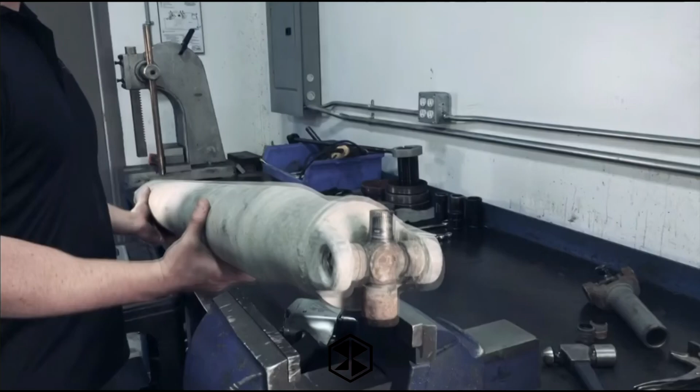This press can be used for a number of different removal and installation jobs on various driveline and non-driveline related parts, such as universal and double cardan joints, wheel studs, and suspension bushings, just to name a few. Any socket with 1/4 inch, 3/8 inch, or 1/2 inch drive can be used in any combination for use on virtually all cars, ATV, UTV, side-by-sides, light-duty trucks, and farm equipment.

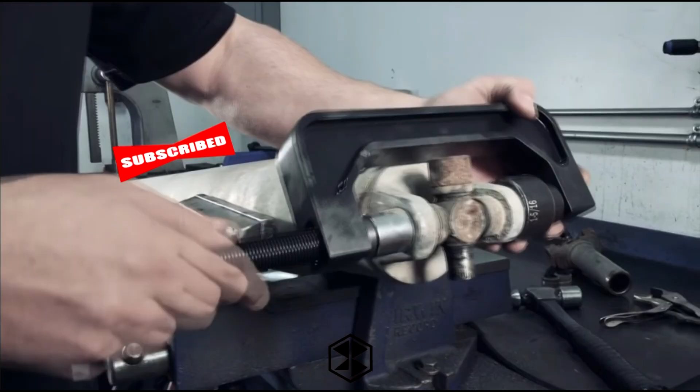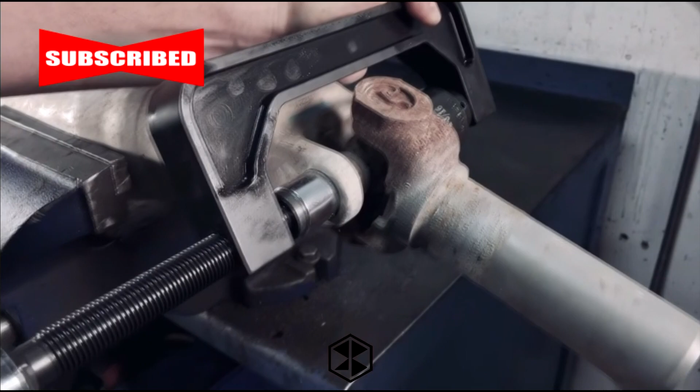Manufactured from high-grade steel for strength and durability, the C-frame can tackle nearly any job with up to 2.5-ton capacity. Each of the components are machined from hardened, self-lubricated steel to help prevent galling and to ensure long life.

Consistent with the rest of the Tiger Tool line, the automotive C-frame socket press is made in North America with quality, reliability, and safety in mind.

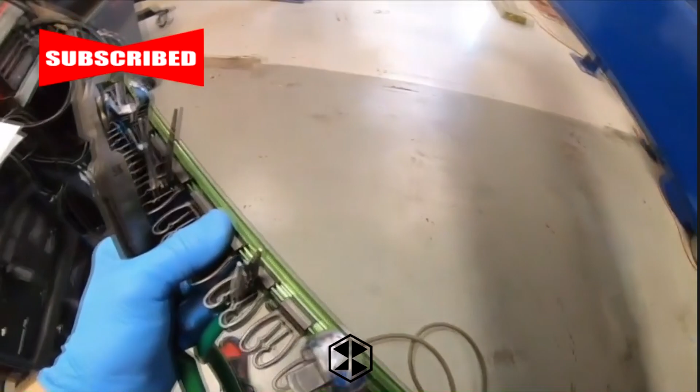I'm Jared Dienda. We're here in Kenosha, Wisconsin at Snap-on Tools World Headquarters. I'm here with John Landry, and we're talking about cordless ratchets. Hand tools are great, but sometimes you need a little bit of power. What do we have? Well, what we have here is a selection of cordless ratchets.

With the introduction of cordless ratchets a couple years ago, it allowed the technician to actually be able to do the work by hitting a button in addition to having the manual torque. We start with the 1/4-inch model, which is a dedicated model that has a smaller profile head, and it has 35 foot-pounds of torque and 350 RPM. This is ideal for under-dash work. A little more compact, and then we start moving up.

And then we talk about the 3/8 model. Again, bigger in size, has a dual pawl mechanism, bigger head, 40 foot-pounds of torque, 280 RPM, and with that, you're able to do intake manifolds. With the long neck version of the 1/4, you actually gain 2.5 inches of access, and with that, you can do belt repair, or you might be able to do some additional bodywork repair.

Furthermore, with the 3/8 model, you're able to do 158 foot-pounds of manual torque, in addition to having the ability to hit the button and get 40 foot-pounds of torque, or 280 RPM. And with that, you might do bell housings, you might do water pumps. All right, so we got 1/4 and 3/8, and then over here we got...

We have the 1/4-inch hex driver, and what's neat about this is you can take a bit, put it into this head, and when you compare it to the profile of a ratchet with a bit socket, you'll notice that you gain almost an additional inch of clearance. Where this is great is where you would do TPMS repair, where you're able to take the wheel, deflate it, access the sensor without removing the tire from the rim.

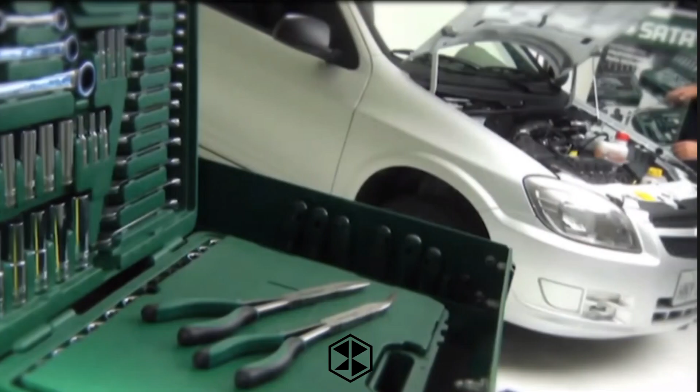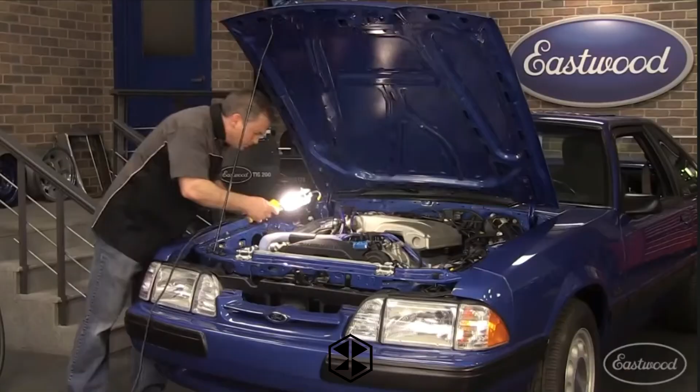Let's take a look at the underhood light. When you're working on a car, you know how hard it is to get enough light so you can really see well. We've all tried these old drop lights. They're never nearly bright enough, and they don't light up a big enough area. And when you hang them up, what happens? It just shines right into the bottom of the hood. And if you hold the light so you can aim it and really see what you're doing, now you can only work with one hand.

Have you ever tried this? Holding a light with your chin so you can aim it and still have both hands to work with? Plus, the cord runs all over your fender and scratches your paint. Not to mention these lights get really hot and can burn you, or worse, your interior.

Well, we've got the solution with the Eastwood Professional Folding LED light. It stretches from 48 all the way to 68 inches, so it'll fit everything from a small car to a large truck. It puts out 1,400 lumens, twice as much as a common LED. Just look how bright this is.

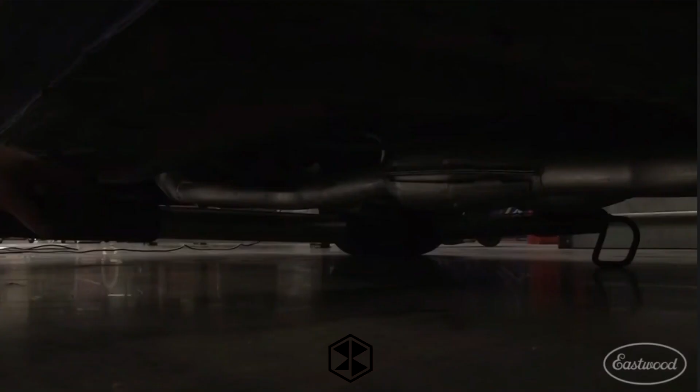And I've got both hands free to do work. The pads protect the paint, and I don't have a drop cord scratching the side of my car. You can use it under your car or even to see when you're working in the interior. It even makes a nice shop light over your workbench.

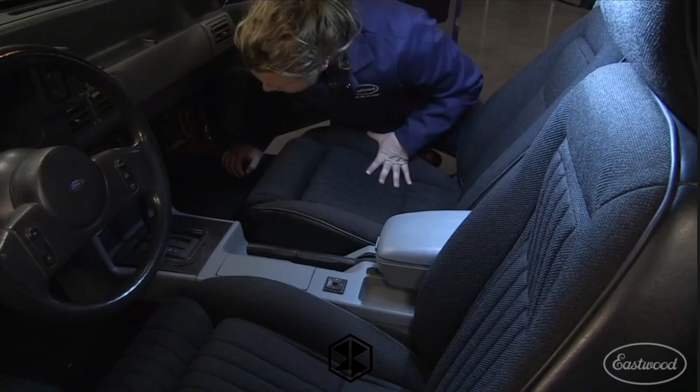Plus, with this light, the center section folds 180 degrees, so you can really angle the light where you want it. Each tube rotates 180 degrees, which really allows you to aim the light exactly where you need to see, whether it's under the hood or in the interior.

It will operate for 3 hours on the low setting and 1.5 hours on the high setting, giving you the light you need to do the job right. Plus, it only takes 6 hours to fully charge, and you can even operate the light while it's charging.

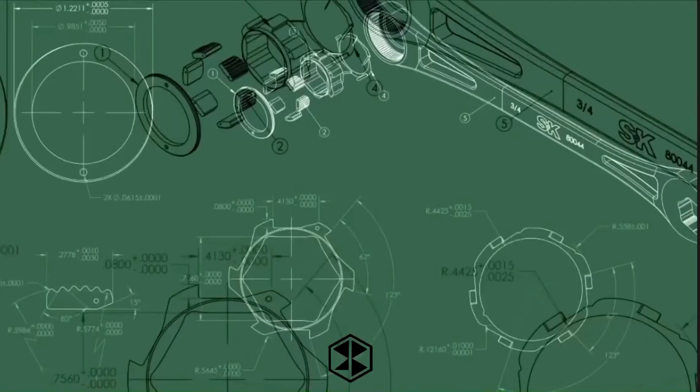With the best-in-class SK X-Frame, a revolutionary ratcheting wrench that gives you more power with the lowest arc swing in the industry, giving you more precision and torque, even in the tightest spaces.

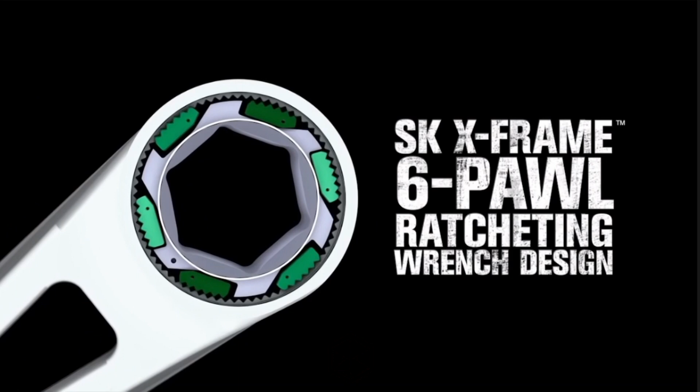Where traditional ratcheting wrenches use a one-pawl system with teeth cut into the wheel, the SK X-Frame uses 6 pawls with teeth forged directly into the body to give you more power.

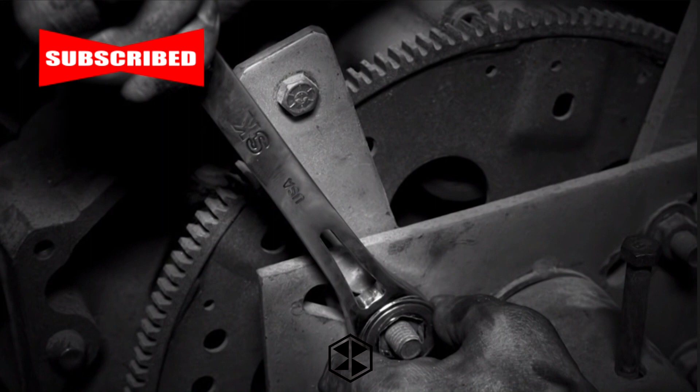They work in pairs, engaging 2 opposing pawls at the same time, making it powerful enough to break free even the most stubborn bolts. Traditional wrenches require the mechanism to advance 1 full tooth in order to engage or click.

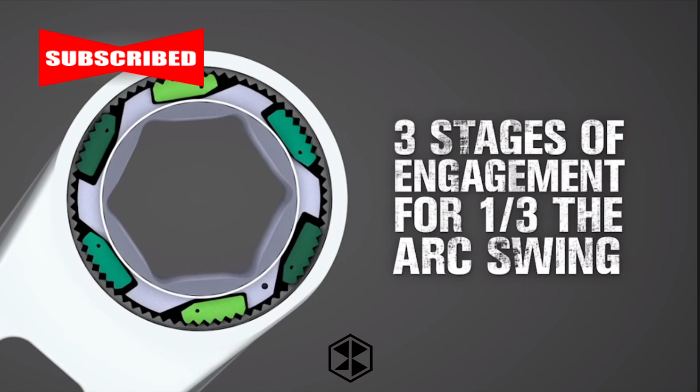The SK X-Frame wrench has staged pawls, so every time you advance 1/3 of a tooth, the next pair engages to give you more precision.

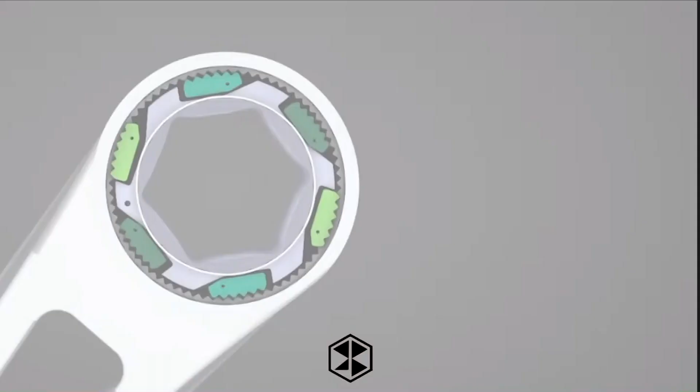At any given time, a pair of pawls are fully locked in with the teeth. At that same time, the next set of pawls are almost engaged and ready to secure. The last pair of pawls are unengaged, but as the mechanism continues to advance, these pawls will be ready to lock in. Having a new set of pawls lock each time the wrench turns just 1/3 of a tooth gives you finer engagement than any other wrench.

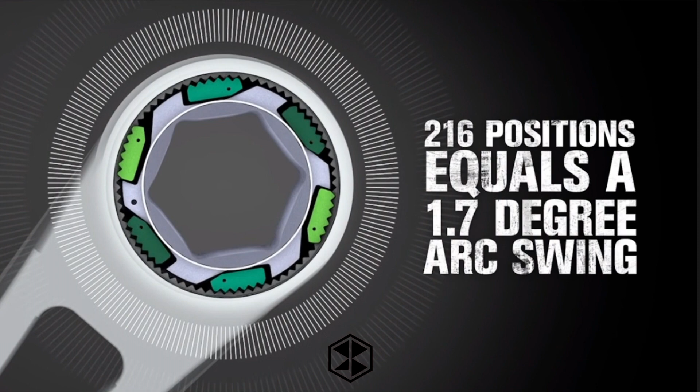This engagement system gives a total of 216 positions for the lowest arc swing in the industry.

This stronger mechanism needed a stronger handle. Our patented X-frame split beam design maximizes strength, power, and comfort like never before. The new SKX frame ratcheting wrench from SK Professional Tools: forged in America with American steel and designed to help you turn your street smarts into street knowledge.

Today, the new digital torque wrench. This new digital torque wrench comes with an accuracy of plus or minus 2% and covers a Newton meter range from 13.6 up to 203 Newton meters. You can run down the bolt prior to the torque value and manually adjust it.

I'm quickly going to show you. Okay, once the green light comes up, you hit the right Newton meter target.

But what happens when you over-torque this application? I'm quickly going to show you.

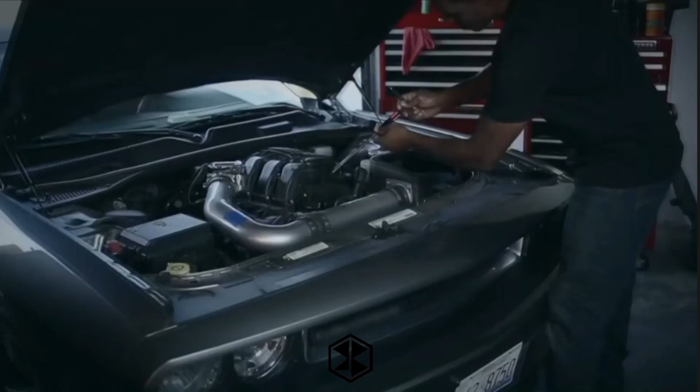Gearheads everywhere have a new ally in the battle under the hood. Crafted in the name of speed and fortitude, the new Mach Series 17-piece T-handle kit quickly produces the right amount of torque in the tightest of spaces.

Lock on a variety of bits to the sleekly designed long arm and reach where other drivers can't. The free spinning handle takes on the heavy lifting while eliminating the headache of resetting with every turn. An aluminum sliding collar adjusts for the perfect grip to power out or tighten down hard-to-reach fasteners.

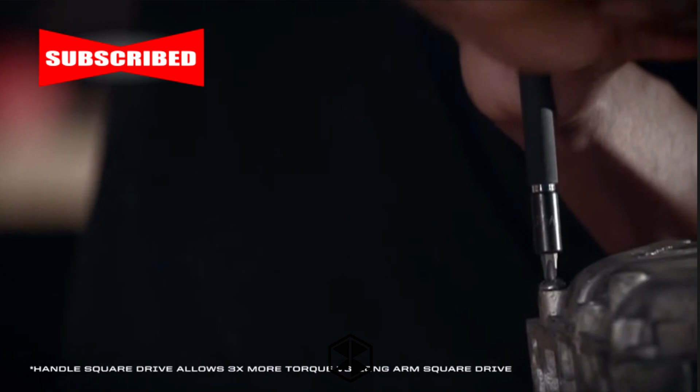Flip and grip the square drive handle to generate 3 times more torque to bust loose weathered and rusted over bolts. Backed by the Craftsman hand tool full warranty, the versatility and power of the Craftsman Mach Series T-handle kit upgrades any garage toolbox.

That's the kind of quality and performance you can expect from Craftsman.